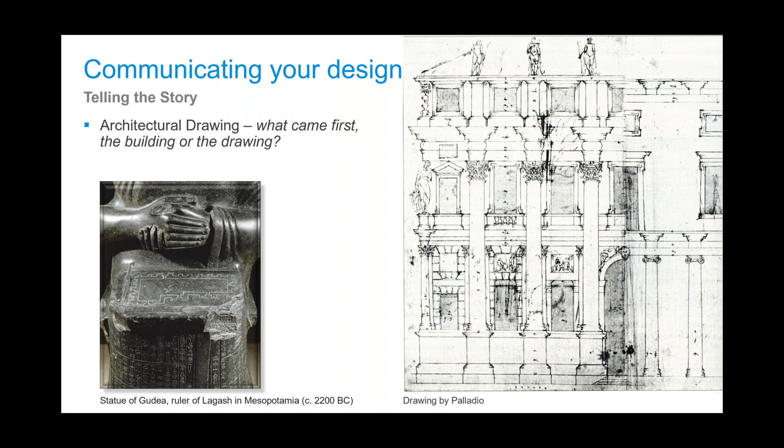Also, when the Renaissance came around, we have the communication of drawings - with Palladio here, you see his drawings and how he represents his style. But it also comes from a whole gamut - how do you capture your ideas, all the way through to making sure that your client appreciates or sees the final solutions you have, and you can have that dialogue about what they want to achieve and how to go about getting that. There are all sorts of different ways and methods, and pros and cons to doing those.

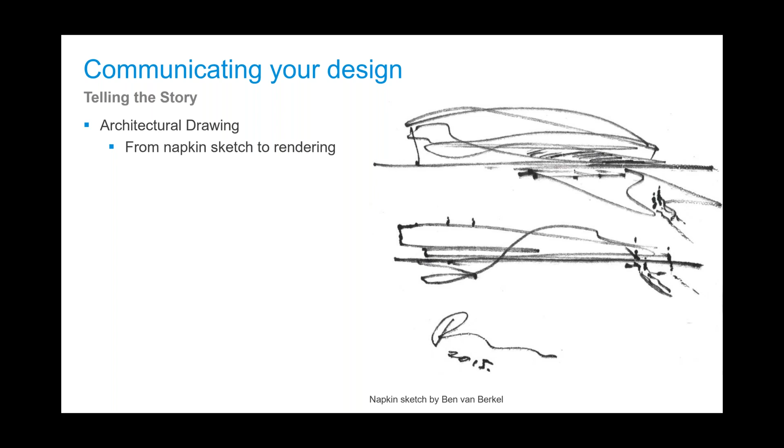Even here, just from Ben van Berkel, the napkin sketch - everyone's familiar with napkin sketches. They're very compelling, they get your idea across, they have the whimsy, but you can also go into more high-end renderings too.

There was a big phase in the 1920s with the futurist movement, where we're having very compelling images about looking towards the future - these impressive, iconic, metropolis-esque Fritz Lang movies. We also had the futurism from Tullio Cralli, where you're getting these buildings, having the interplay between technology and architecture.

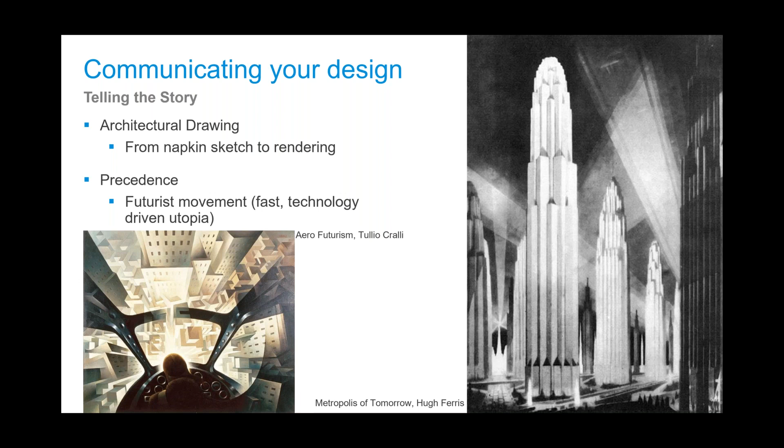So you had that futurist movement, but if you look at it today, we have very compelling images in movies such as Blade Runner - very similar, fast-paced, technology driven, but rather than a utopian future, it's a dystopian future. Still very compelling images come from those.

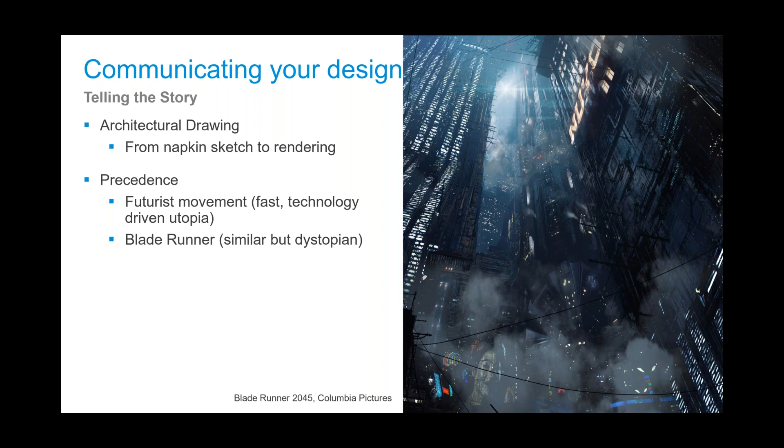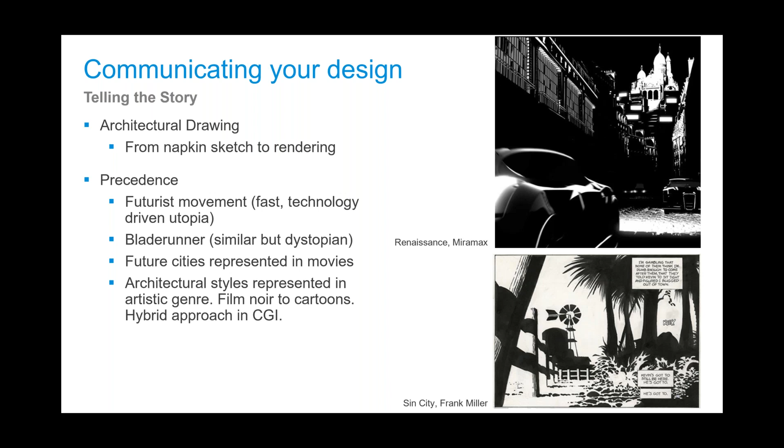But capturing the imagination doesn't have to be highly rendered images. You can also get a compelling image across just in black and white with pencil, very much like the napkin sketch we saw earlier. We also have it in cartoon - here we see Frank Miller with his famous Sin City drawings and cartoons, adding to that mood and environment. We see this with the built environment in other films, this hybridization of film noir with that cartoon aesthetic, plus a hybrid approach using technology tools representing CGI in movies such as Renaissance, the Miramax movie.

So really the question you have to ask yourself is what level of detail should you be providing, and who is your audience going to be? For me, as architects as well, is that you have a fixed budget and you have a fixed time.

For me, you can get carried away with the drawing, with the modeling, and go into sort of high levels of detail because you're exploring it, you're getting involved into it. But yet you could be going down a path where you haven't got that approval. So with your client, he may be sort of happy with just having that dialogue with a concept sketch, rather than necessarily going into a high level of detail where you're actually starting to put color, textures, materials, all of these things in, and then they're not as compelling because you've already given the solution, whereas you haven't had that dialogue with your client to get them there.

So it's that storytelling which is so key to being successful with your renderings. But it's also leveraging, as you got time, the tools and the digital tool set you have. Here we see a FormIt sketch where you can just do a basic massing and then embellish it with the details, using Sketchbook or some other application. You don't need to model up all the details. You can have those details with Sketch, and it helps inform your designs as well.

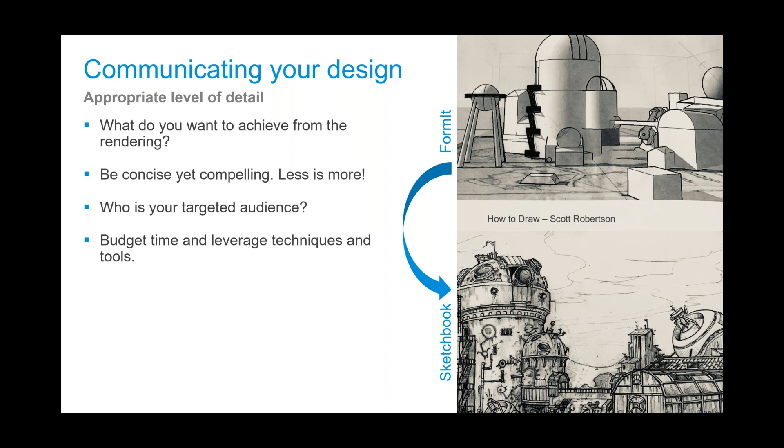So what tools do we have within our architectural toolbox? Personally, I love sketching. I think I've probably moved away from sketching over the years because I've been using more 3D modeling tools, been going into the BIM environment. Yet, as an architect, for me, the sketch is key. It brings me back to how I started off at university, what my passions were, very much the artistic element. And what I really do like is the clean environment of Sketchbook.

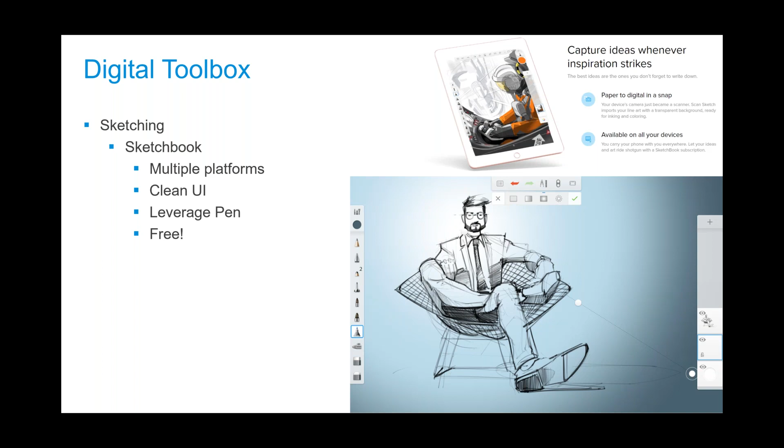You can use it on multiple platforms. There's a desktop version, so you can use it with your Surface. You've got the Surface Pen. You can use it with the pencil on an iPad. You can make it mobile. You can get those sketches. You can add the layers on. You can really embellish upon and ruminate on what your design is going to be. What's really compelling is that it's free.

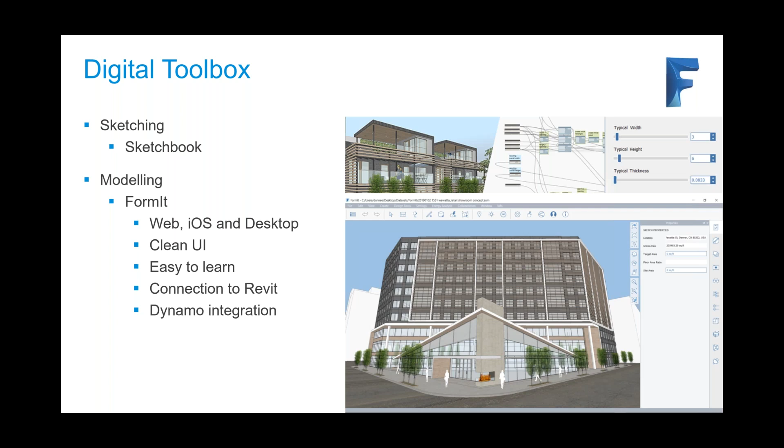We also have FormIt as well. FormIt is going through an evolution, but what's very good about it is having that ability to do that quick modeling, get those ideas through, and then port them over into Revit. And I think this year you'll start to see a lot more of that happening. And then we're starting to get into Dynamo integration. We're going to be seeing more generative design as we move forward, where you can get the iterations happening. It's very easy to learn. And it's on multiple platforms as well as on the web.

And then there's the big powerhouse of Revit. I'm sure most architects use Revit to communicate and share your designs with other consultants as well. It's a great tool for documentation. In Revit 2021, we've brought in real-time rendering. After this, we're going to be doing a bit of a deeper dive into the multiple rendering options that we have. We'll look a little bit at cloud work sharing.

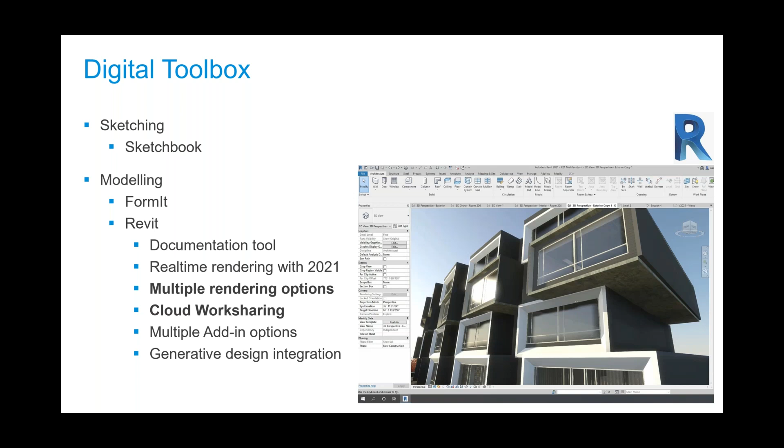What is nice about Revit as well is they have a plethora of add-ins that are very, very good. There's a lot of third-party developers out there that have made integrations onto their platforms as well, and we can talk about that a little later on the next slide. But also we are starting to see integration with generative design too, which came about in 2021. So, that speed, that iteration, also allowing the rendering and getting those compelling images and those iterations out to communicate your design to your clients. And maybe Sheikh, you want to talk a little bit about 3ds Max and Arnold.

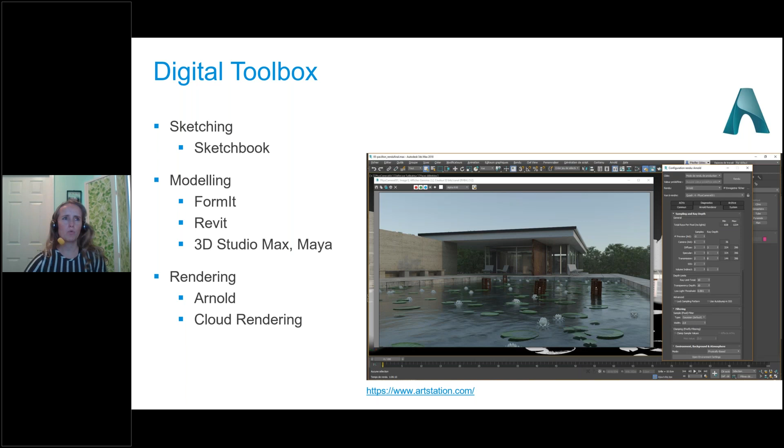While we're switching between presenters, there was a question that came up, Philip, in the Q&A. Does Sketchbook and FormIt come with Revit subscription? They do for the architectural subscription. FormIt does. Sketchbook is free unless you're working from an enterprise. You want an enterprise license, and that enterprise license is pretty cheap. I don't know what the price is at the moment, but that can be deployed across your firm.

Great. And Sheikh, are you able to present yet? Yes. Can you guys hear me? Yes. All right. You can keep the same presentation. I'll just talk about it quickly.

So when it comes to Arnold, Arnold is a plugin inside 3ds Max. When you install 3ds Max, you should have access to Arnold's single machine rendering process. But when it comes to cloud rendering, or batch or rendering farms, I believe the user needs to have access to credits from SolidAngle.

Also, if you don't have access to Arnold right now, you can go onto SolidAngle's website, download the Arnold plugin, and install it. Once installed, you should be able to add it via the plugin manager inside 3ds Max and have access to Arnold's rendering power inside 3ds Max. So after Philip completes the other slides, we'll go inside 3ds Max and Revit and figure out the best process to bring out a scene live in 3ds Max.

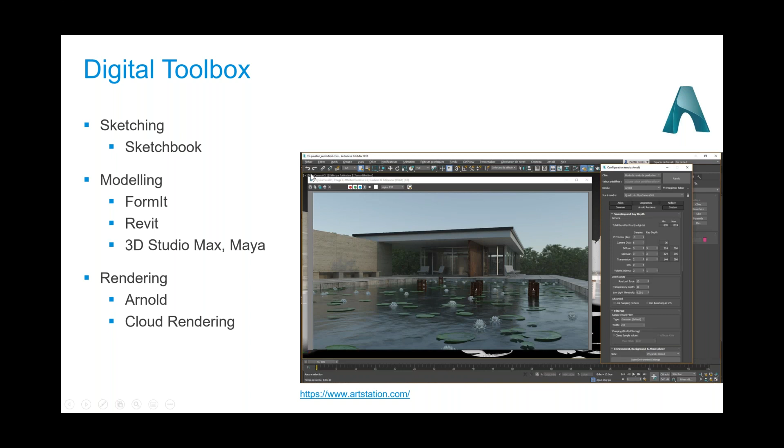Great. Okay, thanks, Sheikh. As I was mentioning, there's a whole plethora of plugins and other apps you can use to make those compelling images, and you have to give a shout out to that ecosystem. They do great work. You can't do a really compelling rendering without some of the tools here, like Photoshop. I've put some of my favorites up there. I have to give a shout out to Enscape too. That's a GPU renderer that does real-time rendering. If you've got two monitors, you put it off to the side. It does some great work.

Lumion, likewise. Everyone in the rendering industry knows about V-Ray and what they do. But there are also the sketching tools that we shouldn't forget about as architects and designers, like Morpholio Trace. If you've got an iPad, do check that one out. Paper as well. It's fun to use and great with the pencil. And Procreate is very similar to Sketchbook, but it's not free.

And then we start to get into VR. Enscape does a great job porting over simply to VR with the headsets. But if you really want to dive into the gaming portion to create very immersive environments, Unity is a great option. And like Photoshop, we also have Affinity Designer, which is also a great application. Enough of the PowerPoint, I think.

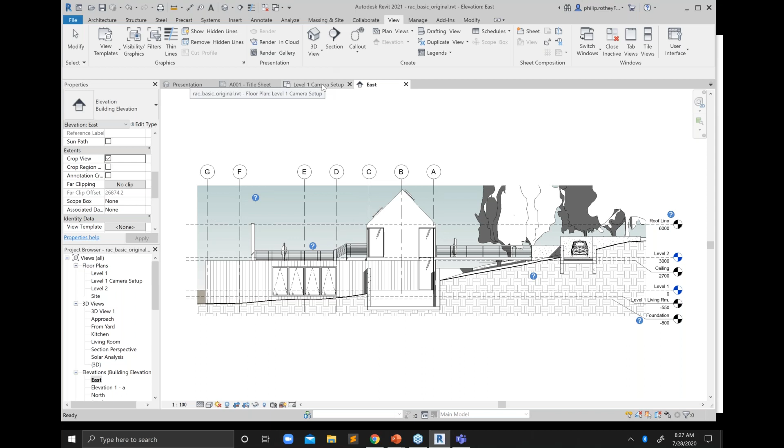Okay, great. So I'm going to quickly jump into Creative View. I'm using the out-of-the-box Revit sample project. It may be unfortunate because it'd be cool to see some great architecture. It's not bad. So the best I could do, I upgraded this model from 2018, like many people will have that.

There have been some improvements to assets and material assets that came in around, I think it was the end of Revit 2020. So with that, it gives a much more realistic rendering at the end. So there were improvements that were made, but we can see how that transpires.

But if I was to go along and look at our camera view, hold on, let me just have a look. Problem is the screen's gone smaller, so I'm just going to try and look. So hold on, 3D view. Here we go, camera. So we set up a camera. We just select the camera from the 3D view, and then we position it where we want.

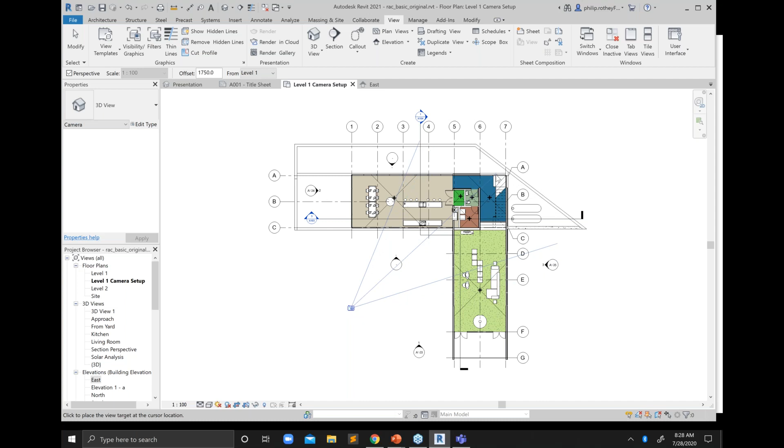We will go to here. We then bring it out, and you see a view, and then it will take to that. We click again, and it creates a view. And then from that view, we can look back. And let's go back to the plan.

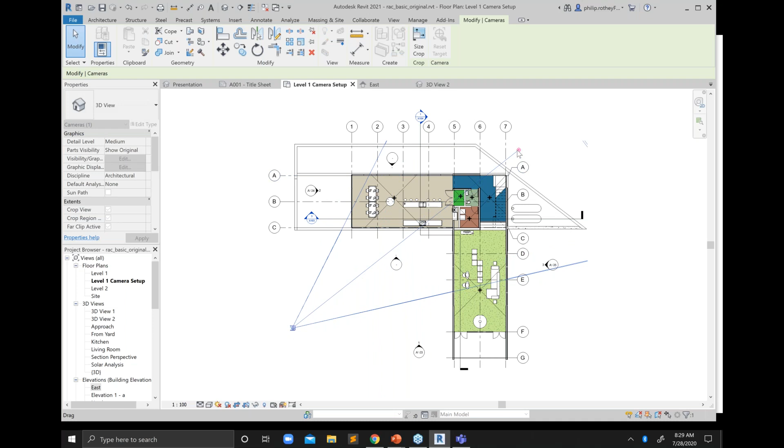You can raise the camera if you go to an elevation, so you can drag it up and drag it down. You can look at it in plan again, and you can bring it out a little further. So we can bring it to here maybe, and you can move the target of the camera around, and we can look at what it looks like in the view. I'd like to capture it a little bit more.

You can also zoom out a little bit further. You can pull these out too, and then bring them up and down, right? So now we've got our little view here. What's going on? Pull this down, and then you just got your simple black and white.

And down in the bottom corner, right down here, here's your visual styles. If you click on these visual styles, you have the various different options. We have wireframe, hidden line, shaded, consistent, and realistic. And realistic in 2021 is now using that real-time rendering. Unfortunately, the little laptop I'm using is not the greatest for showing this, and hopefully we won't overheat.

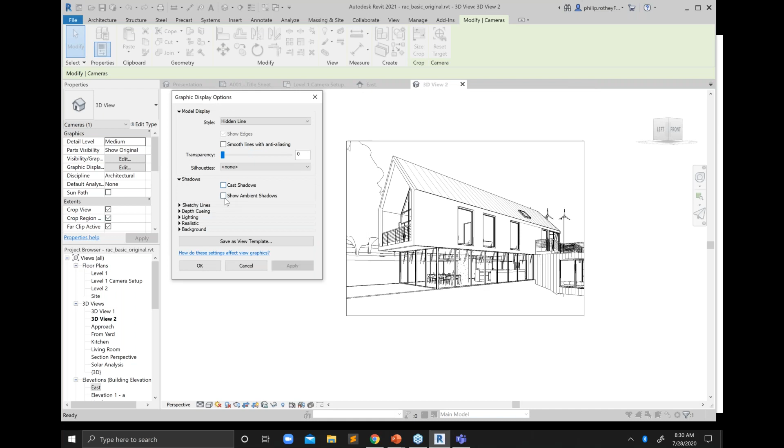But I want to go along and start to look at the graphic display options. Within it, you have a whole series of options. So we can start to look at shadows. It's always very nice to do the ambient shadows. It gives a lot more realism to that particular view. You can apply it, you can then see it. So it now becomes a little solid.

If we look at the lighting too, you can change the lighting intensities and shadows. So you can make the shadows darker, you can make them lighter, and you can apply those too. And then you can also, if you want more of a sketchy feel, enable sketchy lines.

You can change the extensions, which are the lines that come from the edges to give it more of those architectural feels. You can also jitter it to make it more sketchy as well, so you can make it a bit more wobbly. So we're getting more of a sketchy kind of feel. I don't necessarily want to do that.

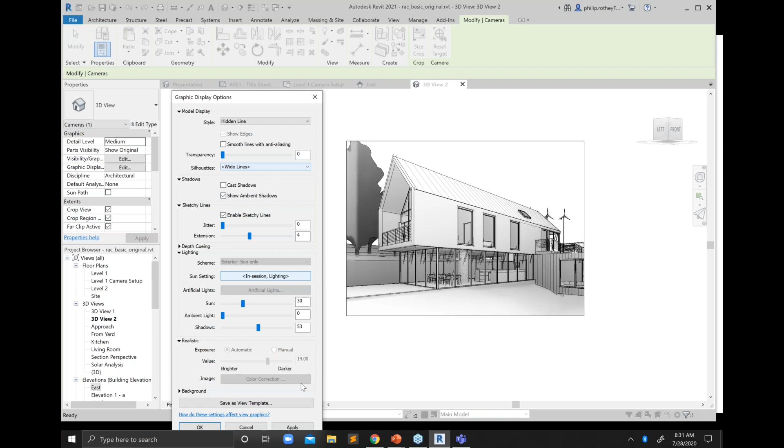Okay, so I'm going to apply those. And now what I want to do is look at it more realistically. But before we do that, let's just look at the silhouettes. I think when you want to punch an image out, silhouettes make the outline of the building really stand out. It gives a much more compelling image. So you would use wide lines, and then you apply those, and already you start to get the feeling that it's starting to punch out.

So for the image here, I like to make the ambient light a little bit more. So let's apply that. Make the sun a little bit stronger. And now you're starting to get an image coming across. Just a black and white image, which you can bring into something like Sketchbook, where you can draw and add colors, you can do it that way.

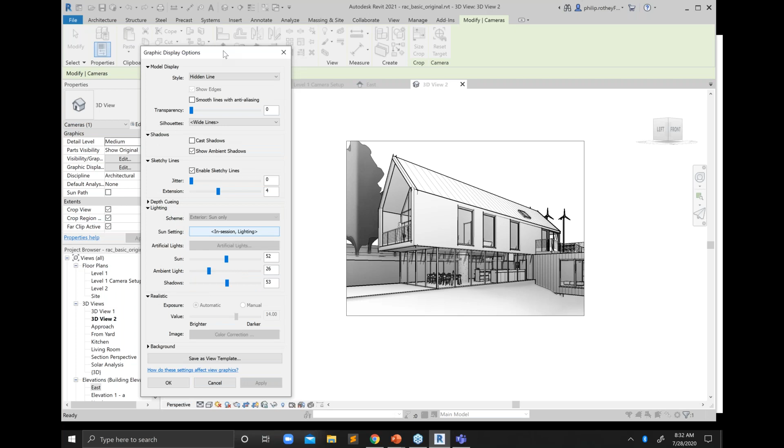We've also got other aspects to it where you can do consistent colors too. Now you're starting to get the colors in, and the consistent colors come from the materials themselves. So for example, if I select the roof here and we look at the colors, if I go to edit the structure, look at the red roofing,

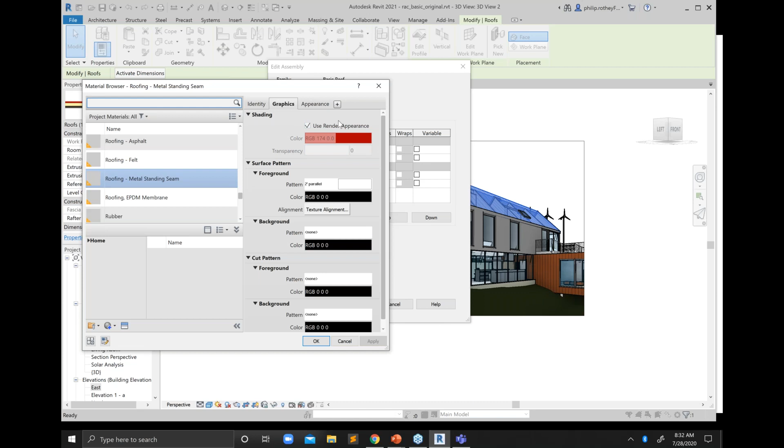you can go here and use the render appearance. You could change that color if you wanted to. So that's with that particular setting. Or if you're going into the real-time rendering here, you could change the color. So they're different things. One is more graphics, the other one is on the appearance side.

So with that being said, we can also look at the realistic view, and this is probably where my computer is going to struggle a little bit. We will have to wait a bit whilst it's doing those real-time renderings. If you've got a fast GPU, this is much better performance as well. So whilst that's having a think, should this go wrong, I've got a presentation view which I was creating here, which I'll flip to in a moment.

But we've now got the spinning wheel. It takes a bit of time. My computer's overheating at the moment.

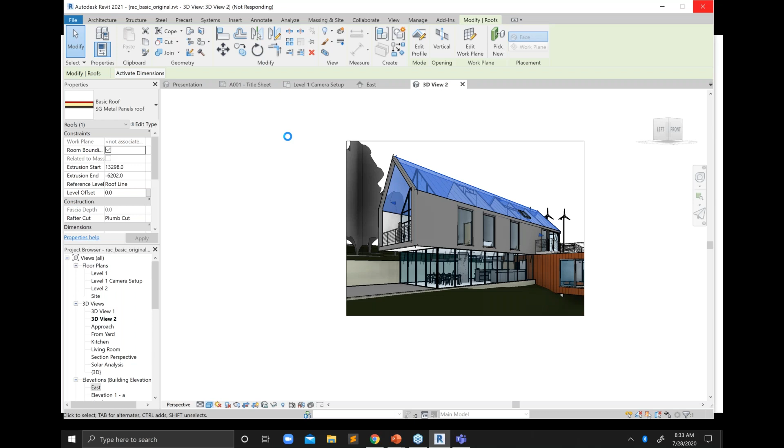There we go. So we have this view. And already you're starting to get that real-time rendering approach. You're getting the lighting, the ambiance coming through. I don't particularly like this metal panel. I don't want it to be red. I want it to be black, or a sort of gray color.

I can then change that by going to the edit type, going to the structure once again, going to the color, and clicking on those little three dots, which bring up the dialog for the materials. And then from those materials, I can also create a new material by going here. And you'll see there's all these little icons.

This means that there's a newer version of the appearance asset that came out, as I mentioned, in 2020, which gives a more realistic rendering. So you can start to swap those out, especially if you're updating your model from a previous version. So I'm going to do that by going into the materials. So I'm going to create a new material.

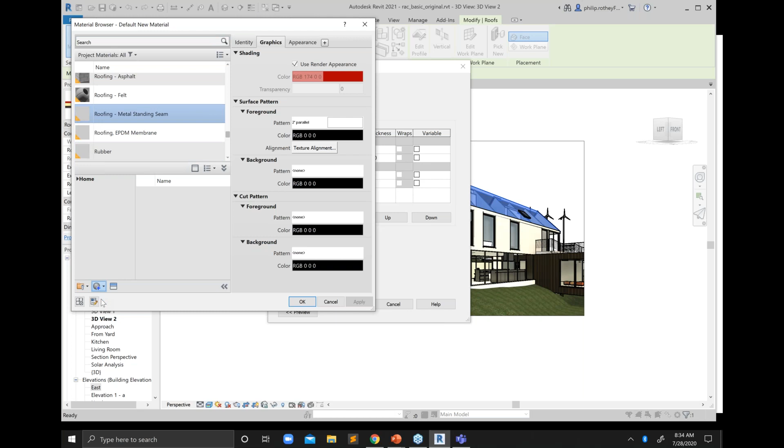And I'm going to rename that material as, let's call it, standing seam gray. So I'm going to add that, but that's just adding a basic one, and then we would go to the asset browser. And within that, we've got these physical assets, and these were all new. These physical assets bring a much better rendering quality.

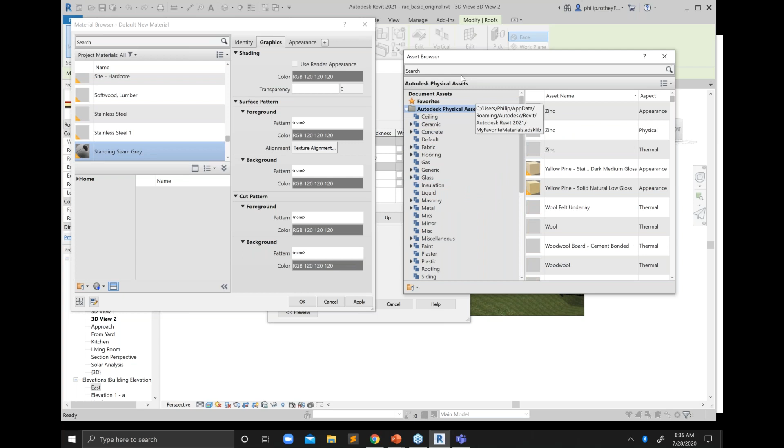And from within those, I can search. Let's do standing. Let's see what comes up. There we go. So let's look at roofing. When it hasn't got those icons, it means it's with those new assets. So we go in, and there's this button where I can bring that particular material into this gray standing seam that I've created.

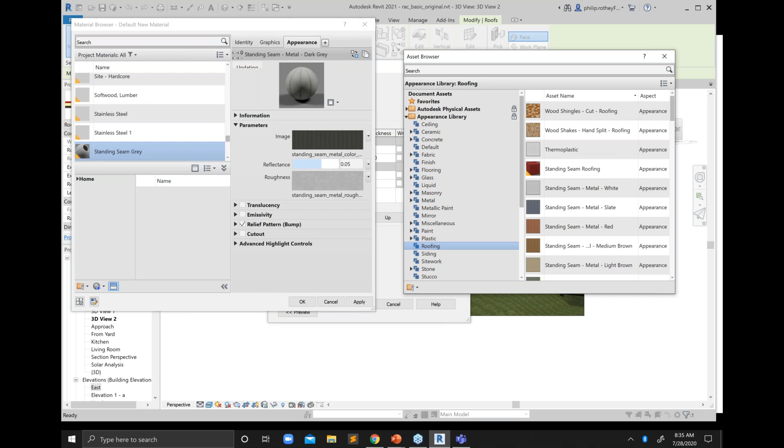You click on that button, and then you will start to see the metal roofing. And I knew from when I was doing a rendering that it was actually the roof. So let's just go OK. And so I've got that. Go OK, apply.

Okay, let's unclick that. Hopefully that's going to be a gray color. There it is. When I was looking at this, although not in this particular view, but when I was doing a realistic view, I noticed that the standing seam was going the opposite way. It was going 90 degrees perpendicular.

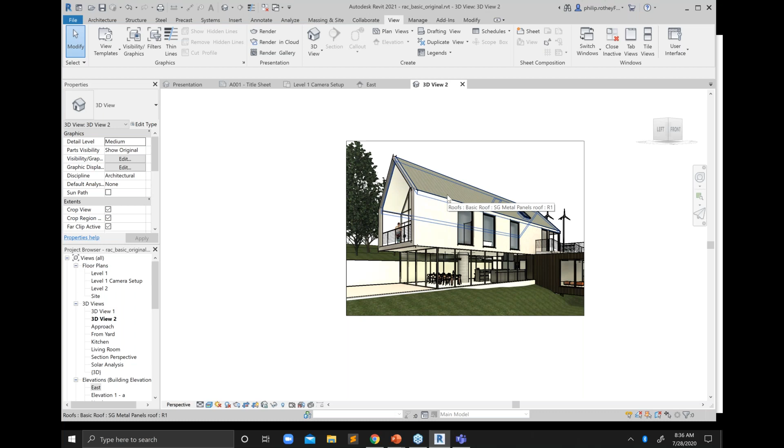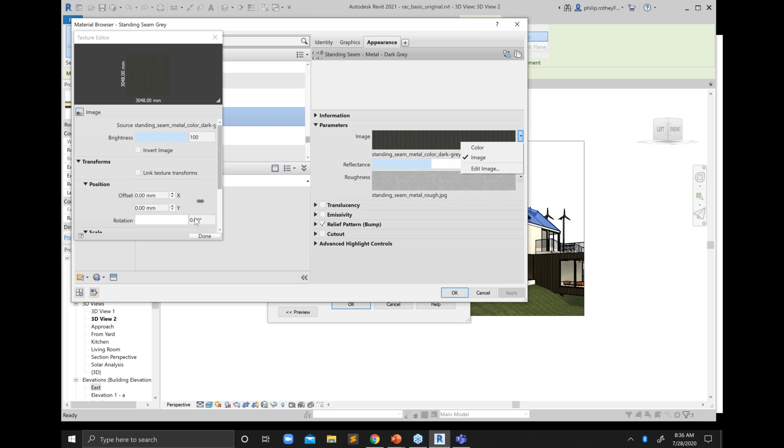So I would change that by going back to my edit type. I can go to the standing seam, click on those three buttons. And then within those assets, you go to the appearance, because this is where the realistic renderings come from, they use these materials, and you can change the orientation. There we go. You can change the orientation by clicking on the 90-degree and rotating it. Once you've done that, it will rotate it the other way.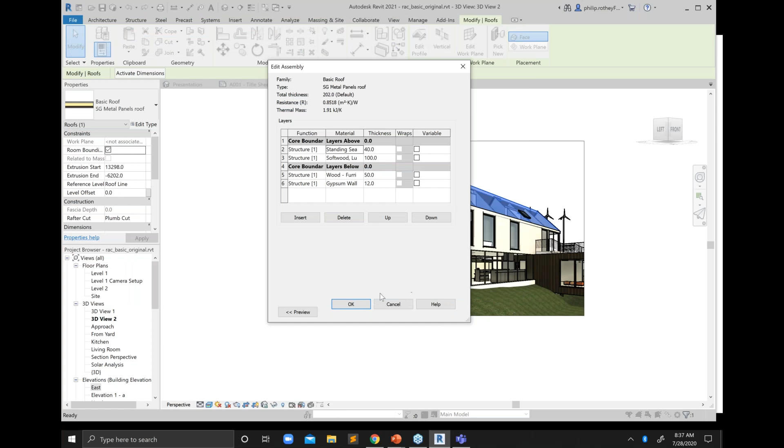You'd also have to make sure that the bump map or other assets coming in are changed in those same directions too, because you don't want a crisscross pattern. So once you've got all of those, you're feeling good. You like what you see. So this is what I did earlier, just in case things went wrong. This was the view that I created.

And then it's like, well, how do I get this into more of a realistic rendering? There's two options here, apart from the third-party plugins like Lumion and Enscape. You can go to the view, and you can go to render. This will do the rendering using your own resources on your own personal computer, or the desktop computer that you've got.

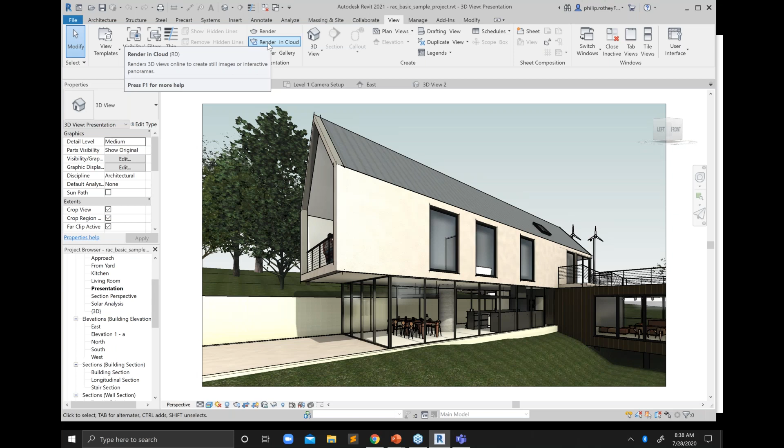You can set up various things, like the style for the clouds, and when you render it, that's what I call the old school way of rendering, where it's going to churn and spit it out. You get a better quality rendering. Alternatively, we also provide a service which is rendering to the cloud. You select render to the cloud, and it comes up with this dialog box. You could suppress it afterwards, but basically you select the 3D view, the service, what sort of image you want, and then you just press go. It will go to your cloud render gallery, and you can pick it up there.

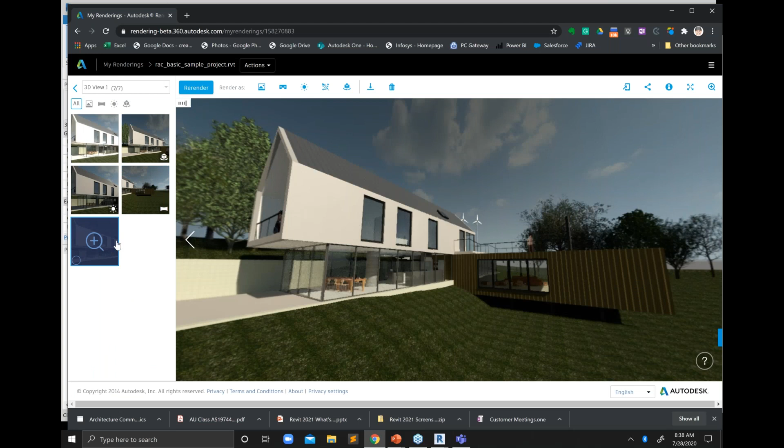And just for the sake of time, because I really want Shake to talk rather than myself, we can go straight to the cloud and see what sort of things we have. These were some of the images that I created. This was this image here. It's an image of the same thing, but rendered to the cloud at low resolution. I wasn't doing it final.

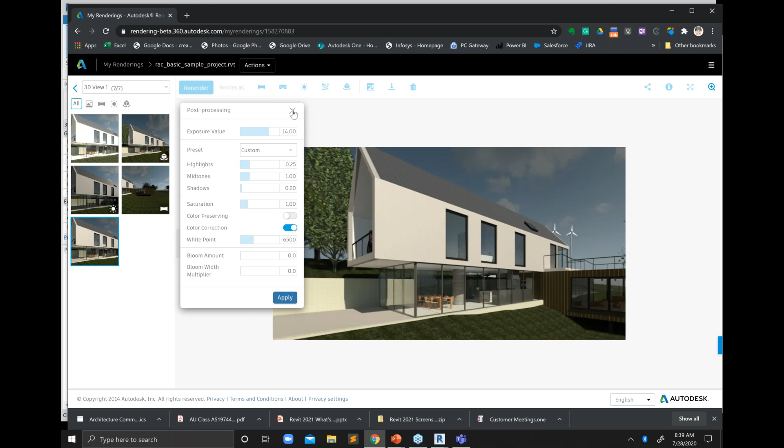If you want to improve it or make changes, you can select post-processing, and with that you can change the values, add bloom, change the saturation and shadows, and end up with a different type of image, however you want to change those. This is still at that low quality, and you can go and get higher qualities.

You've also got these other ones where you can get a panorama. You can share those panorama views with your clients, where they can look around and see the building itself.

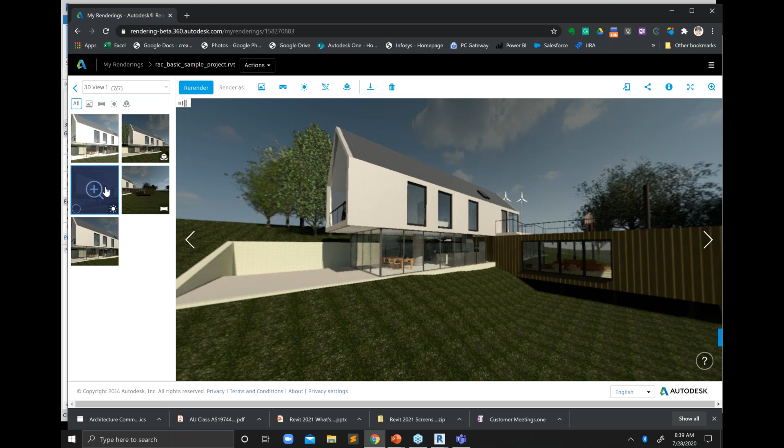Alternatively, you can also look at solar studies. You can send one model up to the cloud, and go through the interface here and create those illuminations and shadow studies. So here's the shadow study that was produced, and you can say what the frequency is. This is every hour from 9 o'clock to 9 o'clock, depending on your location, of course.

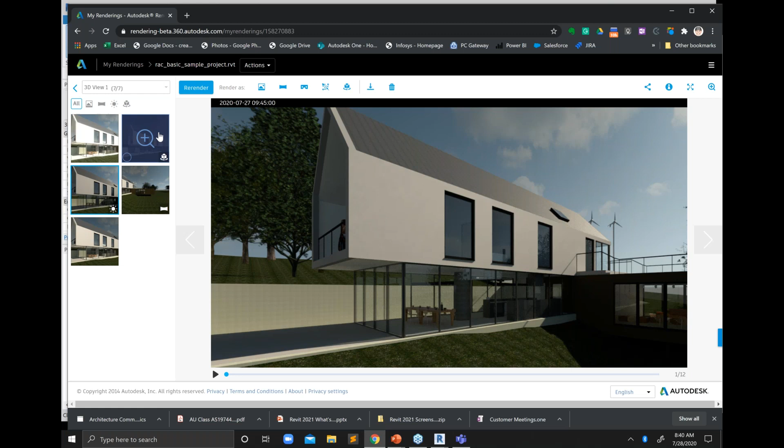And finally, this one I completely cocked up. This is called a turntable. I didn't realize you had to be in the middle for the turntable to work. So we're actually in the model. It flies into the model. Not a successful one, but nevertheless, it's worthwhile taking a look at.

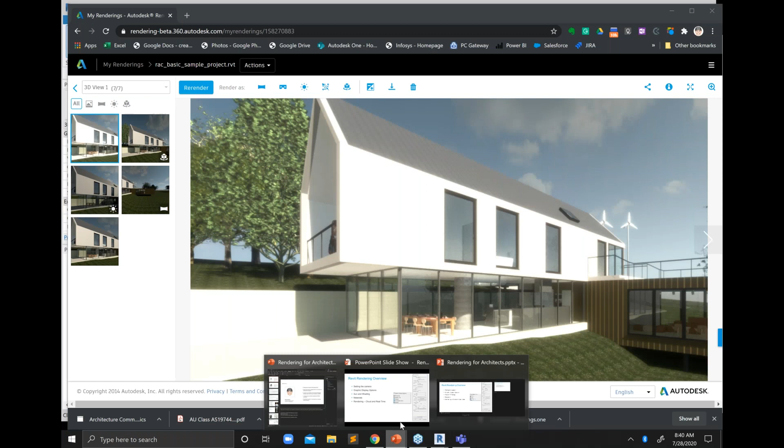Awesome, thank you for that, that was awesome. So when it comes to plugin, I spoke a little bit about how Arnold's plugin works. It's just an install or a download from the Solid Angle website, or if you've got 3ds Max, it should be automatically available when you install it.

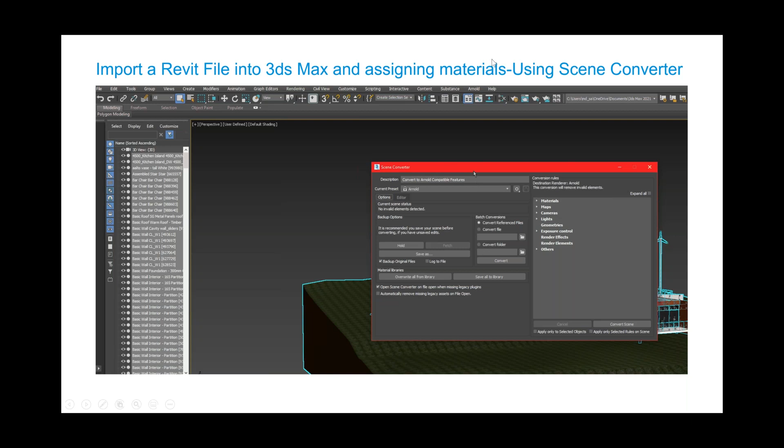Before we jump really into Shaik, I think what we might do is just quickly go into the slide to get to the final one - can I do that, or are you controlling it? I think you have control. Do I have control? Oh, that was Shaik on my side, it doesn't matter. No, you've got control, sorry about that, Shaik. You carry on - I'll mention the resources at the end because I think they're very useful for the audience to see. Understood, can you go back two slides please? Oh sorry, am I controlling it? Oh, there we go, yeah, there we are. Sorry, I thought it was you.

So yeah, let's get into Arnold and 3ds Max, and let's see how we can bring Revit files inside 3ds Max and how you can modify or play with it to get the output you're looking for. Starting with the plugin itself - Arnold is a plugin, as I mentioned before, available via the Solid Angle website. If you guys want to download it separately, Arnold is available for other applications as well, like Rhino, Maya, Houdini, and other applications out there. So if you don't see it inside 3ds Max even after you install it, don't panic - you can just go into Customize, go into Plugin Manager, and you should be able to install the plugin. Just make sure you have the plugin placed into the 3ds Max stdplugs folder on your computer. So that's it.

So what we're going to see is, since we're at limited time right now, I'll try to be a little concise since this is more of a Revit to 3ds Max process. We'll talk about how you can export from Revit and bring it into 3ds Max. There are two ways you can do this, and we'll also be setting up a basic exterior lighting with Arnold Sky Dome - just a couple of simple processes you can get and not have to sweat a lot. It shouldn't be more than 5 minutes to set it all up. So let's go in - can you go into the next slide please?

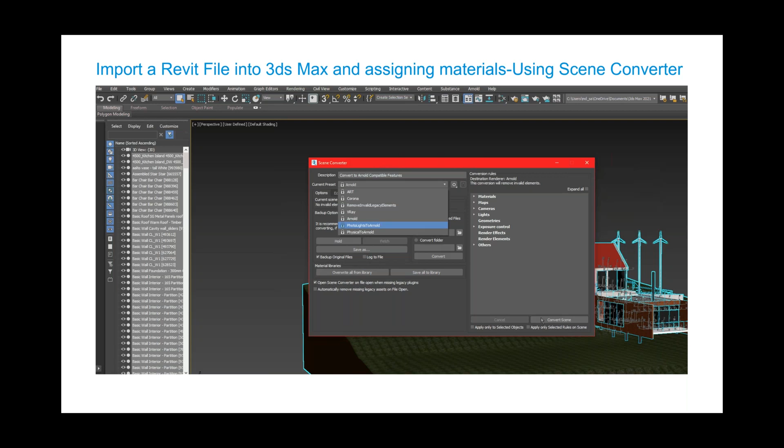So on the top left, that's how it should look in your viewport, depending on what you've set it. You can set it as high-end, like an active shade inside your viewport itself, but that would take a lot of machine resource. If you don't want to do that, you can just set it on the regular standard default shading or high quality shading. I would not go to high quality still, I would just be in standard shading. So that is a standard shader out there.

On the top, on the bottom right corner, that is how it could look inside Arnold after you have imported it. You haven't done anything, no lights, no post-processing at all. It's just a simple render. Press F9 and you should be able to get that look quite quickly.

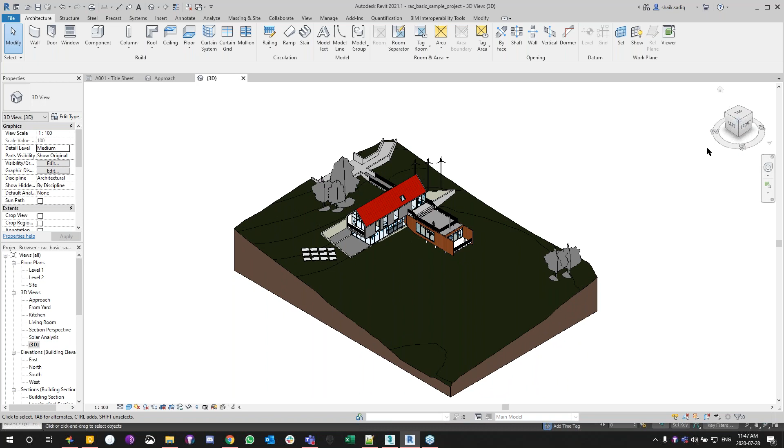Yep, so this is just a basic data set. Anyone who has Revit 2020, 2021, or 2022 should see this on the sample list as soon as you open the file itself. In order to properly export, just make sure that you're not in any of the other views, make sure that you're in 3D so that you should be able to do this. I'm not much of a Revit expert, but I know how Revit works, so this is all I know how to export from Revit to 3ds Max.

Philip, you can back me up if I'm doing anything wrong, because I'm pretty sure that the user needs to be on the 3D view to be able to export. Yes.

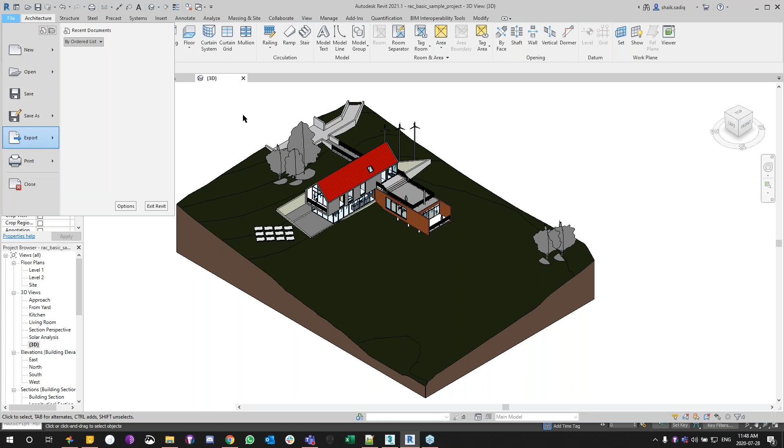Awesome, thank you. So once you're in 3D view, just make sure you go into File and do an export. You can do an FBX export. I've already done it since I'm on a smaller machine on a laptop at this time, I would not go ahead and do that, it does take a little bit of time for me. So I've already exported it. Just go into File, Export, and do an FBX export. Once you are done with that, you should be able to go into 3ds Max and import the FBX file into 3ds Max.

Even to do that, there are a couple ways to import the Revit file into 3ds Max itself. One would be just directly importing it, going to File, Import, and you should be able to just import the FBX file. There is another way, which is going to File, Import, and you can link that particular FBX and you can actually work on it. That means, let's say you're working in 3ds Max with that particular file and you have linked it to the FBX file, which is somewhere on your machine.

And let's say if you want to make any changes inside Revit, you could actually export that with the same name, the same naming convention, and it will automatically update that FBX file if it's linked properly inside 3ds Max. So if you do any changes inside Revit and export it, it should automatically reflect those changes when you import it this way. So that's another way. For this case, since I don't have it enabled, I will go ahead and just directly import, open. And these are pretty much standard, I wouldn't go and change any of these.

In case you have any animations, I wouldn't go ahead with this one, because if you're going to 3ds Max, I would recommend doing animations inside 3ds Max, like camera animation and all that. Lights are okay, unless you don't want the lights - I'll show you why. And cameras, pretty much standard. If you want, you can get the cameras and convert those cameras and lights using the scene converter to much friendlier objects inside 3ds Max that is much friendlier to Arnold rendering. So before I do that, do any of you have any questions?

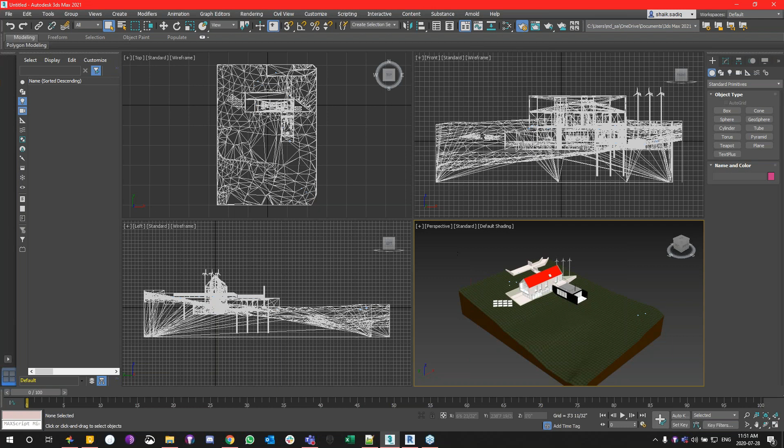We do have some questions. I'm going to open up Fred's line - he's been patiently waiting with his hand raised. Oops, I've just lost Fred. Hold on, it disappeared. Let's try this again. Fred Hallman, are you able to speak to us? I think you're self-muted, do you still have a question? Oh, that might be why I lost him - he probably unraised his hand.

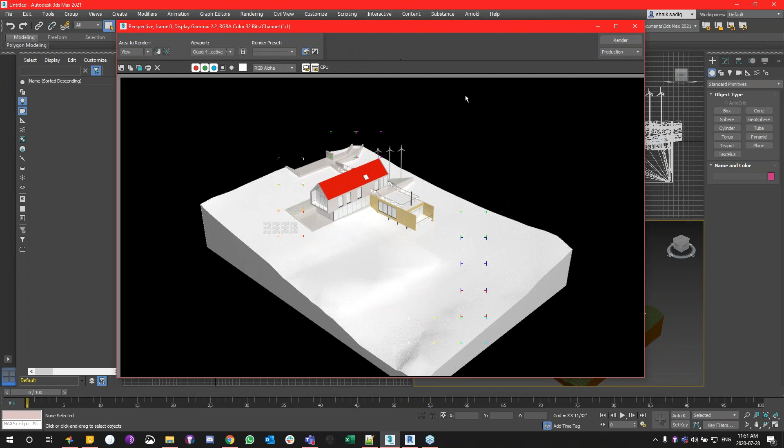Okay, let's go to - I apologize if I say the name wrong - Vandana Verde. I'm going to open up your line, are you able to unmute yourself? Vandana? Michelle, while they're doing that, just 8 minutes left, okay? Thanks, yes, thank you for keeping the time for us. Okay, so it looks like she might not have a question after all, so I'm going to remute her.

Let's go to Dan O'Neill's question. He says: hi there, I am just starting an MArch program, I participated in the FormIt webinar and now the Revit webinar, and these are great exposure to software. Can you give me a brief differentiation between AutoCAD, FormIt, and Revit in the conceptual design and sales phase of architecture, and when each might be used? I think that's a super good question, I think it's kind of fundamental.

Okay, going to try and do it quickly. So AutoCAD is really where - it's much more of a 2D environment. If you were doing a sort of layout, landscaping, or wanted a workflow into Illustrator, that's where I'd use AutoCAD. It also does a great job documenting and doing text overlays to actually make your PDFs and images that way. It's a great tool, easy to use too. But speaking of easy to use...

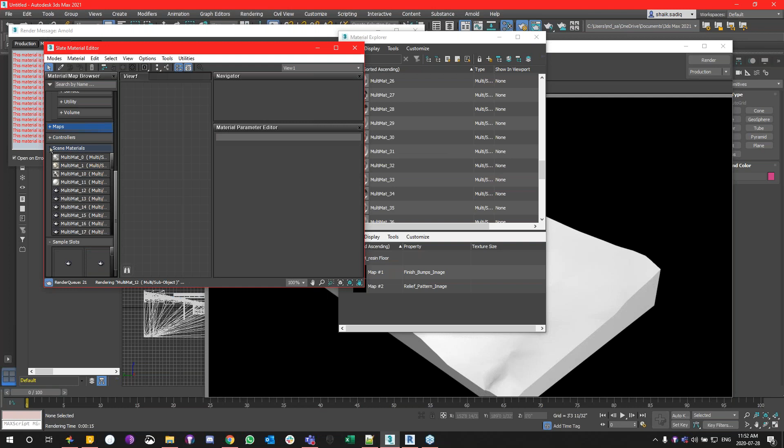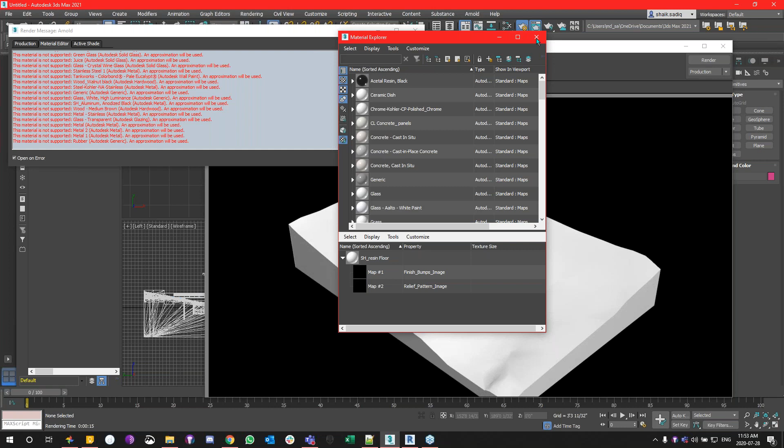Formit is a great tool, very simple interface, and you can create compelling images. You can also start to dabble into Dynamo to get computational design, some repetitive elements going in - you can get very compelling images out of it too. And then Revit is really a powerhouse. It's definitely something where you do your documentation in. The big benefit is the work sharing, so you can collaborate with lots of other people. You can do a little bit of that in Formit on the web. You've got the ability to take Formit geometry into Revit, and you can also use the Revit cloud rendering, as well as starting to get your design intent into more construction drawings. Hope that answers your question.

Excellent, I think that did wonderful. Okay, so the next question - let's see, I'm just looking for some we haven't answered. Oh interesting, someone is saying the music is distracting and I don't hear any music, so I'll have to look into that. Patricia is saying: in terms of time, real-time rendering software like Enscape and Lumion are fairly quick and get graphics to clients - how does this process compare in your experience?

If I could take this - I believe Enscape and Lumion are more VR geared, this is more non-VR geared. So Philip, if I'm not wrong, Enscape and Lumion are in that area, right? Yeah, they also come out with renderings too. I mean, the benefit with Enscape is it does do a great way to get to VR very quickly. I think when we look at real-time rendering within Revit now, you have that ability to have it - it's very GPU resource heavy.

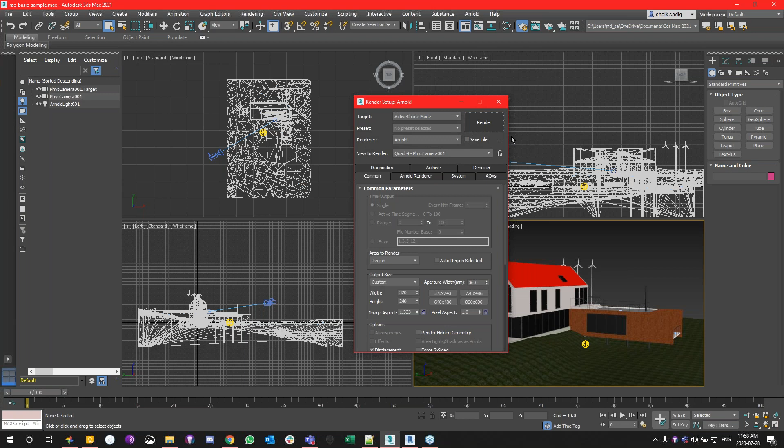FormIt is moving very much towards more of a generative design, Dynamo-based platform. That's where the development is going. It's also looking at this year; we'll start to see great integration with Revit, whereas there tends to be what people call a dead workflow with importing other files like SKP files or SAT files.

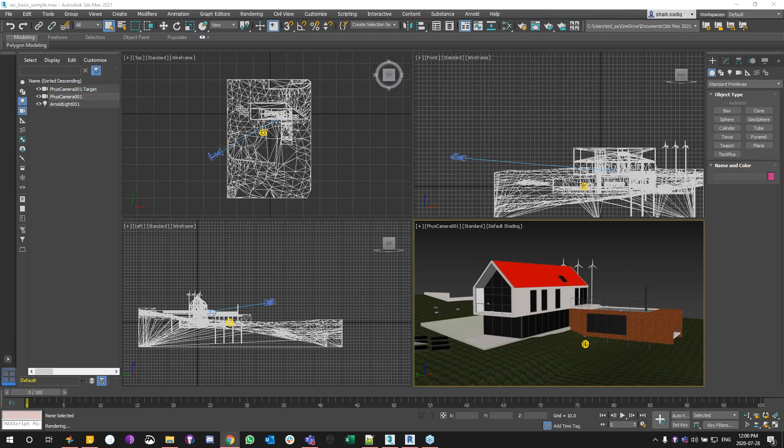Okay, so we've got the questions there. Some of the useful links to go along with this: I still think drawing is a compelling way. We had some questions about trace and Sketchbook. There's a great book out there by Scott Robertson, How to Draw. Check it out. He talks about that hybridization between the digital and the sketch. Do check that out. Another one, Steven Shell did a great 2019 AU presentation.

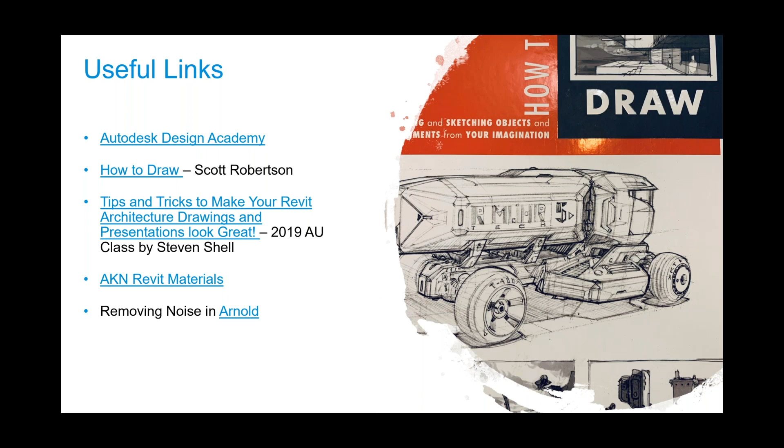He's very awesome at communicating. It's been recorded. He gives you great tips and tricks for Revit. I even picked up some good things. And then there's an article here on the Autodesk Knowledge Network.